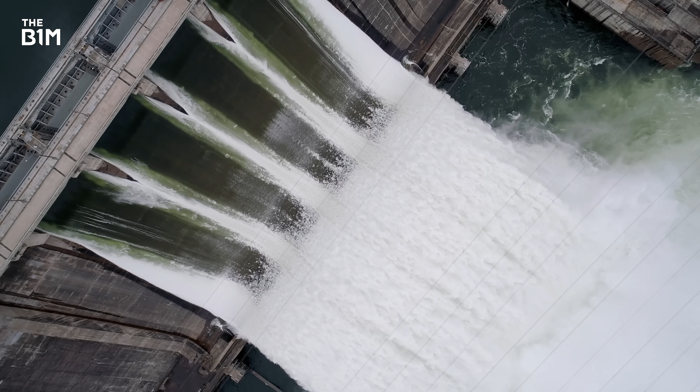Wherever they're built, dams are pretty critical pieces of infrastructure, but if they go wrong, they can go really, really wrong. In Russia, a dam collapse has forced thousands to leave their homes. Now rescue efforts are continuing in Brazil. Water from the old Cajado Dam washed away houses and cut off a major road.

This is the story of a dam built just 19 years ago that has already been declared doomed and completely unfixable. Now the government is in a race to build a second dam downstream before it suffers a catastrophic collapse.

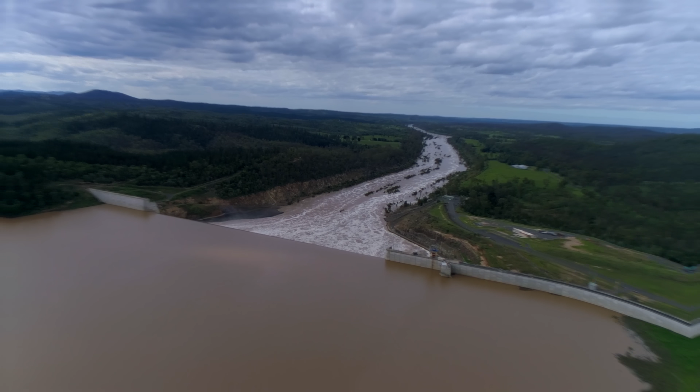This is Paradise Dam. Built in 2005 at a cost of $240 million Australian dollars, it spans 600 metres across the Burnett River in Queensland. Some 60,000 people live downstream from it. It's a vital source of water for the farms in the region, and it was supposed to stand for more than a century. Only it won't.

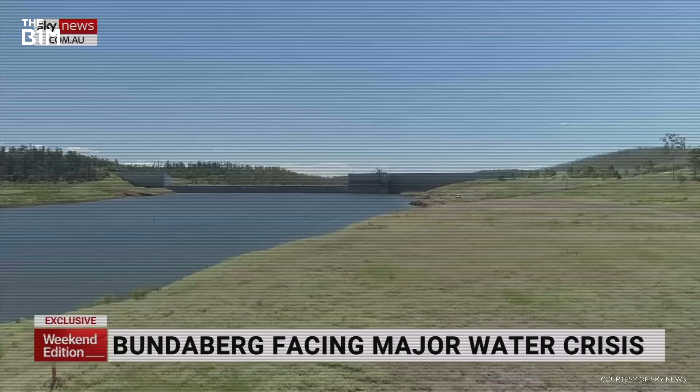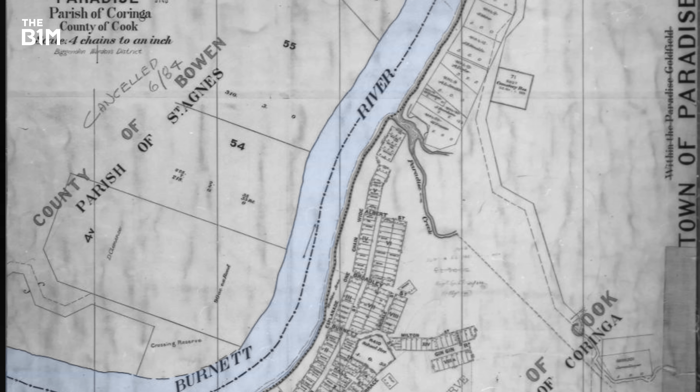It's now been deemed one of Australia's largest ever infrastructure failures and will have to be entirely rebuilt a few metres downstream. So, how did it come to this? Once a source of riches, the Burnett River played host to prospectors who travelled here to a town called Paradise to pan for gold and make their fortune in the late 1800s.

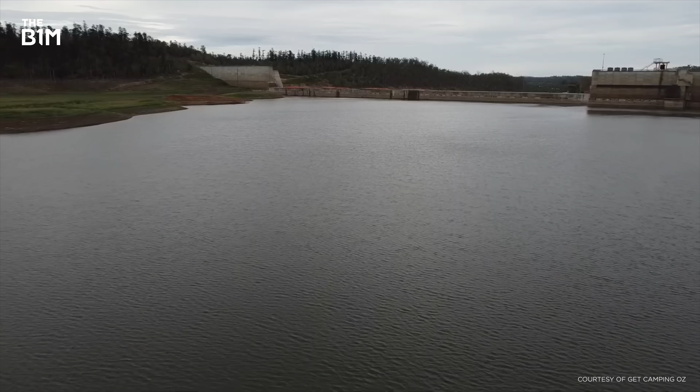But by 2003, when construction of the dam began, Paradise had become a ghost town. So it was decided it would be sacrificed and submerged beneath a new man-made lake that would be created behind the dam. The new dam was then named after the old town, but it wasn't long before problems started to emerge. The structure was severely damaged during record-shattering floods in 2013. $23 million Australian dollars was spent to repair the dam wall, and it was declared safe.

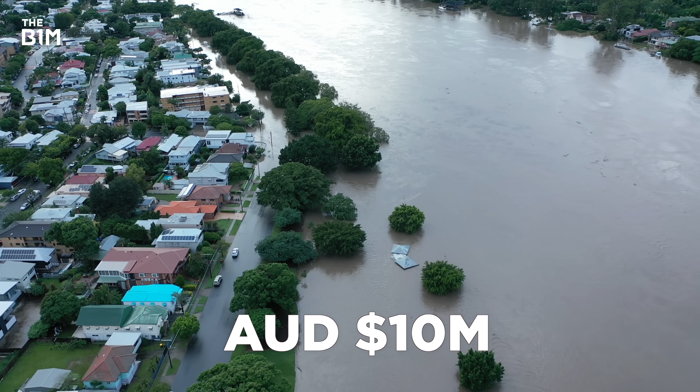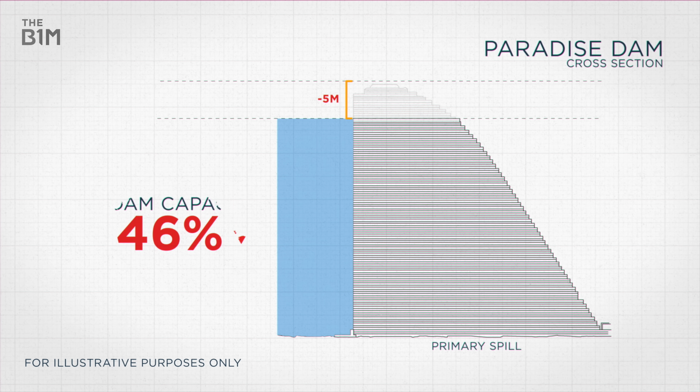But despite that, concerns remained, and an independent investigation found an additional $10 million Australian dollars worth of safety work had to be carried out. To address these concerns, the wall of the dam was lowered by 5.8 metres in 2020. That reduced the dam's capacity to just 46% of what it should be holding, but it meant there was less risk of catastrophic failure.

That, in turn, sparked protests from the farmers who depended on the dam as their source of water. With less water, there's less they can grow. It also puts them at the mercy of Australia's dry climate. You see, dams are especially important for places like Australia, a country that's prone to long and devastating droughts. Water is extremely precious.

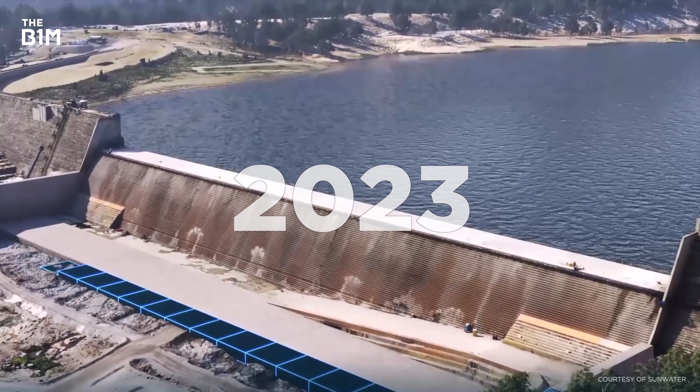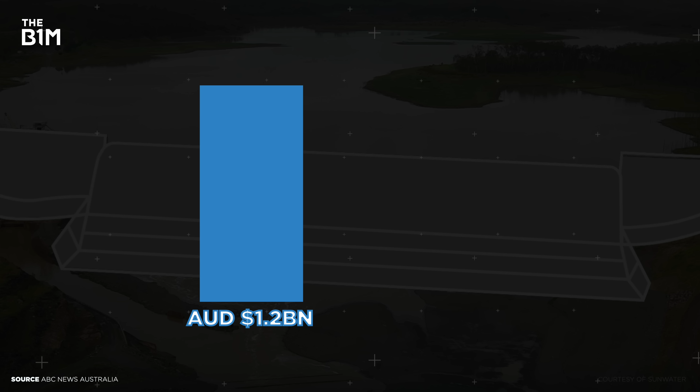In 2023, work began on repairing the wall to return it to its original height. That was supposed to be done by raising the height of the existing structure and reinforcing it by buttressing the wall with additional concrete. The state and federal government committed $1.2 billion Australian dollars to the project, far more than the initial $240 million to build the dam in the first place.

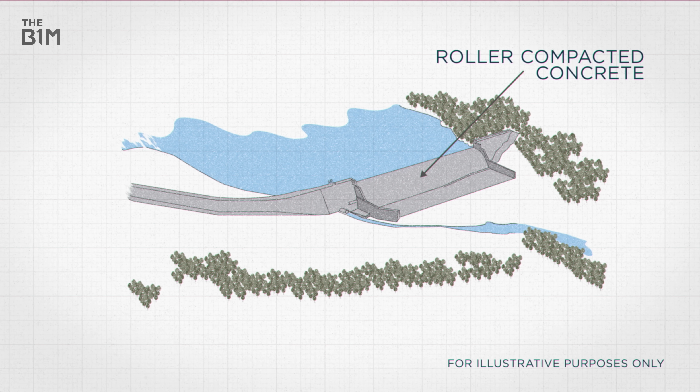But these works were eventually scrapped when experts on the site investigating the wall declared it couldn't be mended or reinforced. They discovered concrete in the dam was losing its strength over time. Now, some of the issues with the concrete in the dam were already known and had been known for years. That was related to the bond between the layers of roller-compacted concrete within the structure, the foundations under the secondary spillway, and the risk of erosion immediately downstream of the dam wall.

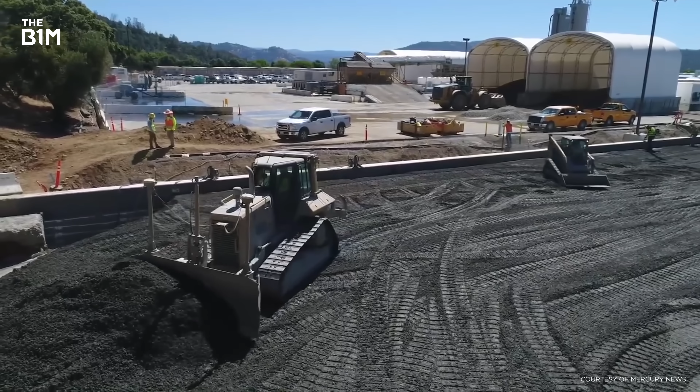Paradise Dam was actually the first roller-compacted dam built in the country. It's a more cost-effective way of building a dam, and it's done safely throughout the world, but it does use less cement. But while investigating, the dam experts found even more issues with the concrete.

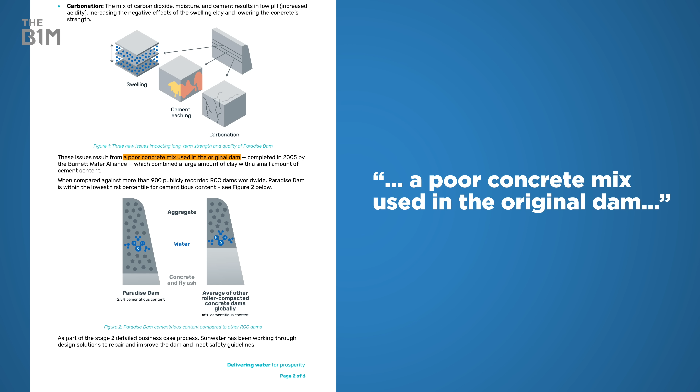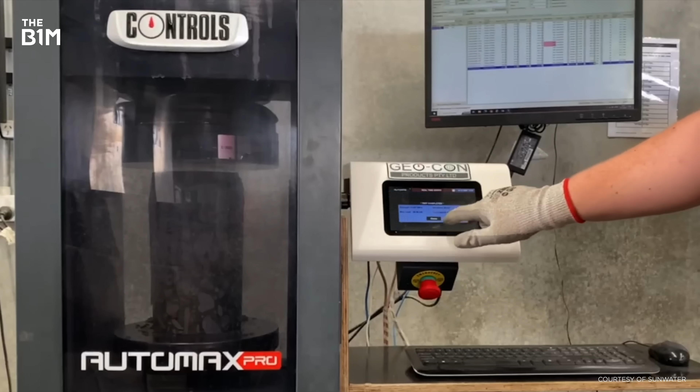Because of a poor concrete mix used in the original dam, which combined a large amount of clay with a small amount of cement content, the dam wall became prone to swelling and contracting with moisture. The porous concrete also caused the cement to leach out, leading to structural weaknesses. When they discovered this, the team of international experts put samples of the concrete through a range of tests, including artificial aging and compressive and stiffness tests. They found the concrete degraded far more quickly than was expected.

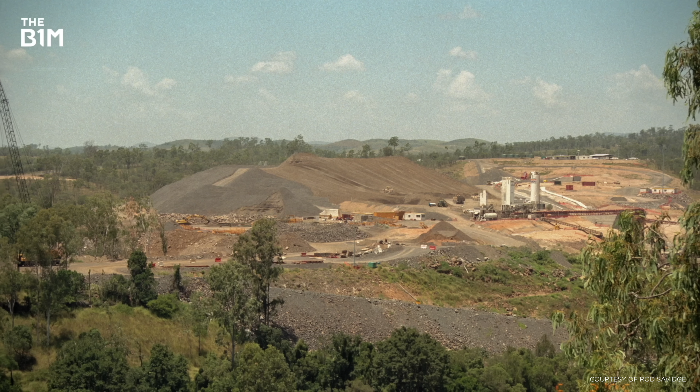Now, clearly, a huge project like this is expensive, and balancing the budget is no easy feat. To keep track of a multi-million-dollar operation, you're going to need to make sure that you're confident with money.

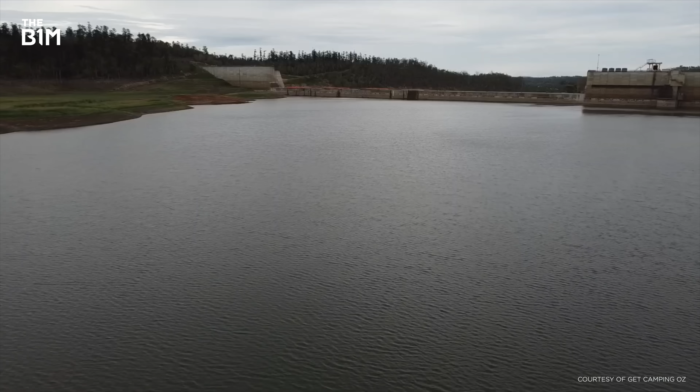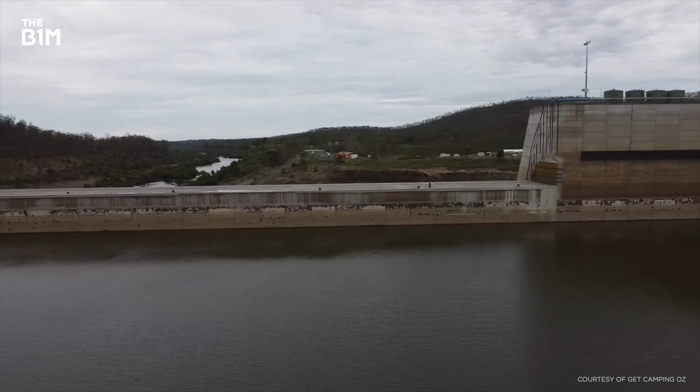So, after spending millions of dollars to build and then repair the dam, and then committing $1.2 billion to fix the issue, it was finally decided they would abandon the thing altogether. They determined the only solution now was to rebuild the dam 70 metres further downstream and then partially demolish the original dam structure. Queensland's troubled Paradise Dam will have to be rebuilt, with thousands of residents downstream told it has too many issues to be repaired.

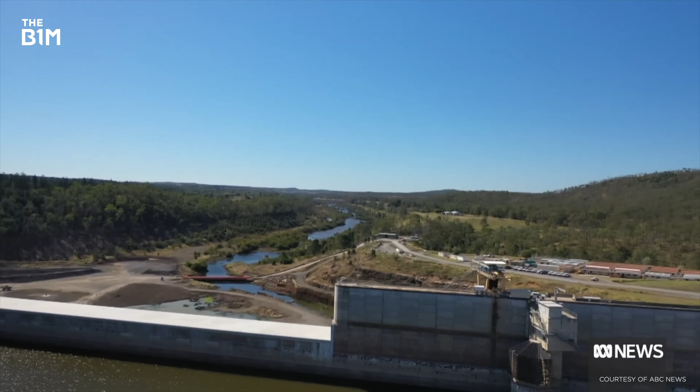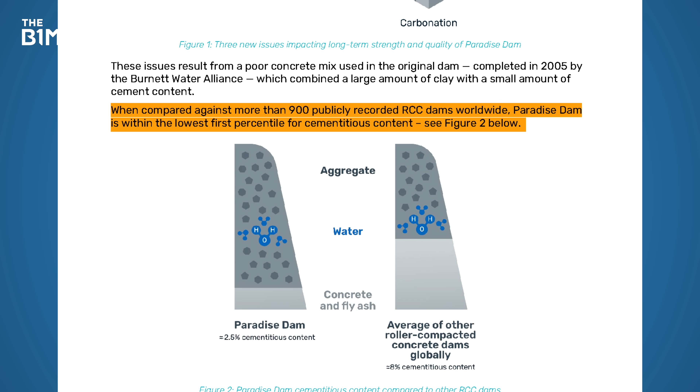Needless to say, the farmers were not impressed, nor were the 60,000 people who live further down the river. Now, to reassure everyone, experts say the dam is not in any immediate danger of collapse and may last many more years without any incident. Those experts just don't believe it's going to last the 100 years it's supposed to. In fact, when measured against the more than 900 other publicly recorded roller-compacted concrete dams, Paradise Dam ranks among the very lowest in terms of cement content, which isn't good.

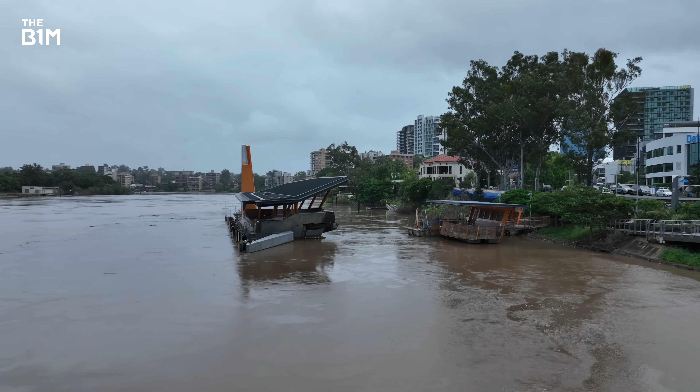Prior to the wall being lowered, the dam was at risk of failure in a 1 in 200 year event, which is what the 2013 flood was. But because of climate change, extreme weather events like these are becoming an increasingly more likely occurrence in Queensland, a state which has seen more than its fair share of record floods and severe storms in recent years.

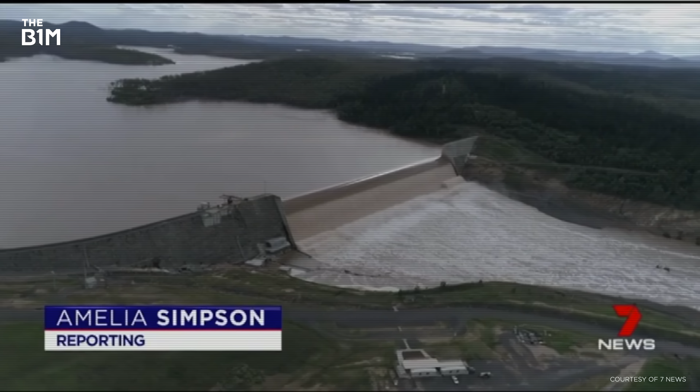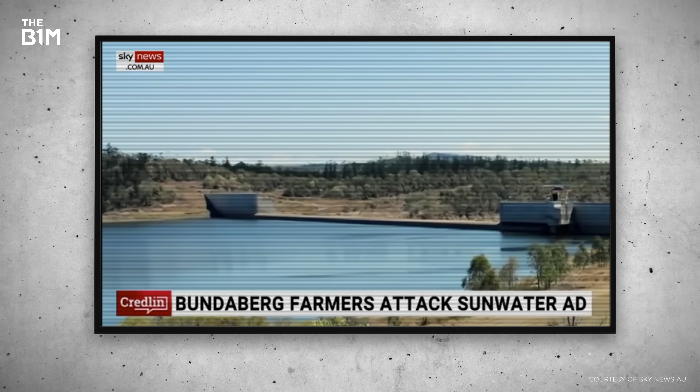Paradise Dam has the capacity to hold 300,000 megalitres of water, but now that water level will be reduced to 42%. Because the wall has been lowered and there's now less water in the reservoir behind it, it's now at risk of failure in a 1 in 5,000 year event. But that still isn't safe enough, and the dam isn't operating as it should. Nor is it storing nearly enough water, and that's going to be a problem in the long summer months ahead.

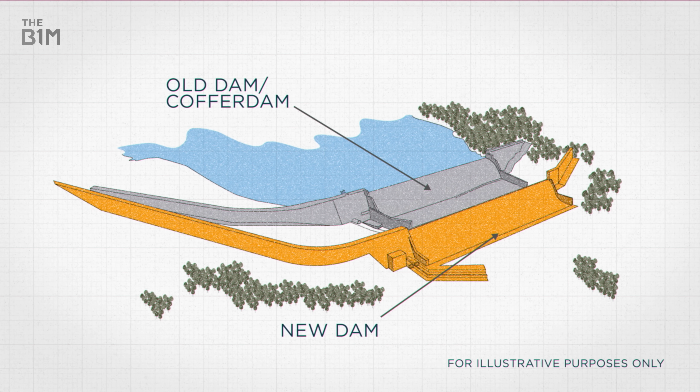Plans are currently being drawn up and a business case put forward for the second dam. Most likely, the existing dam will stay in place for now and be used as a cofferdam to create a dry and safe working environment during construction, meaning it'll hold back the river while the work begins. The new dam will then be built pretty much in the same way that the original one was, only this time we assume with a lot more cement.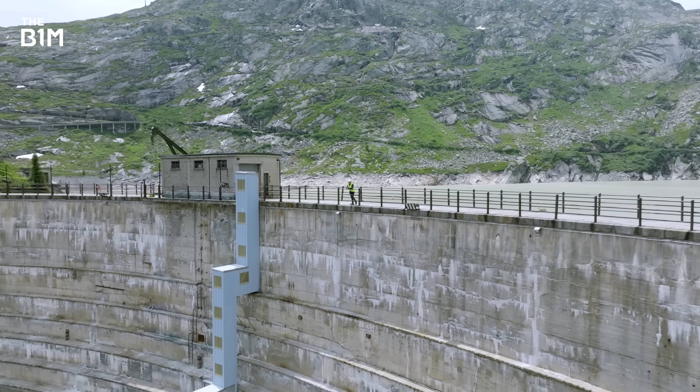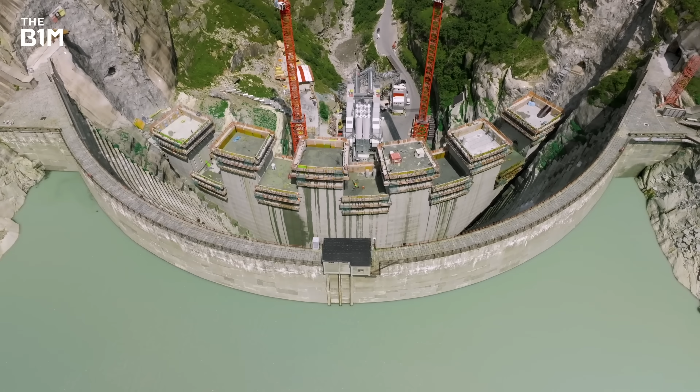Now, strangely enough, there is actually a precedent for this, and it's one we've covered in depth before. The Spitallamm Dam in Switzerland, which was once one of the tallest in the world, is having a second dam built directly in front of it because of a crack that makes it beyond repair. Only the Swiss dam is nearly a century old, and the cost of building its replacement is just $140 million US, quite a lot lower than the price tag of $787 million US already pledged to repair Paradise Dam.

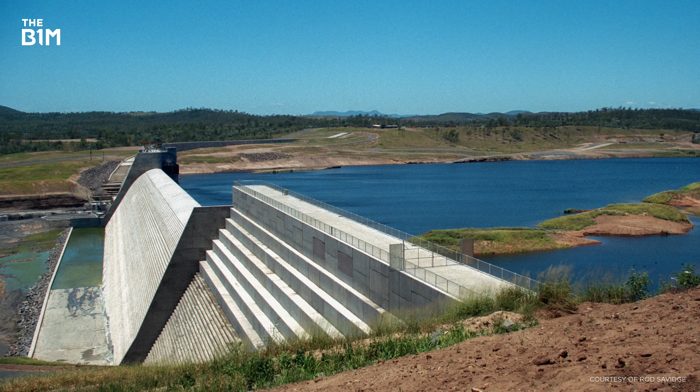It's been a turbulent journey for this Australian dam named after the sunken ghost town it submerged. Unfortunately, it too seems destined for a watery grave. The hope now is that the second Paradise Dam is going to be built in a way that can withstand as many 1 in 5,000 year events as the Queensland weather can throw at it.